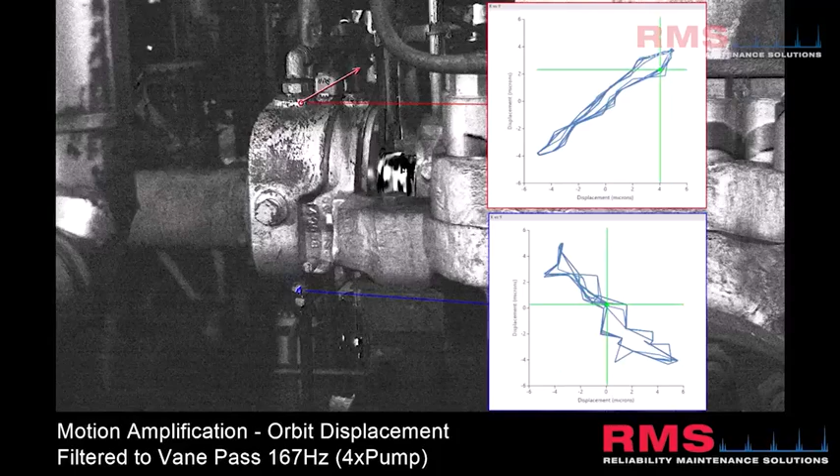And this is where we have a machine that might have a natural frequency, and that might be on the structure or part of a component, that when it's excited, the amplitudes rise dramatically and can lead to catastrophic failures such as cracking, bearing problems, coupling problems, seal problems, all these host of problems. But to identify a resonance problem, we need to measure the natural frequencies.

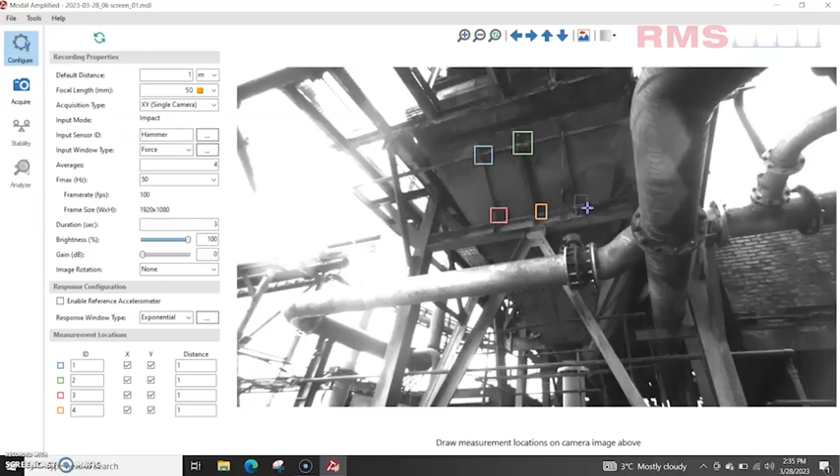And this is where this new Modal Amplified kit comes in, where, it's quite amazing, we're going to use the camera non-contact. We're not going to be putting accelerometers on to do a modal test. We're going to use the camera and we're going to use ROIs, little boxes drawn on the image, to actually measure and calculate the natural frequencies.

And then beyond that, we'll be able to see the mode shapes, where we can actually see the movement of the machine. And when we can see that, we understand it even more. And then we can maybe look at bracing, other techniques like that.

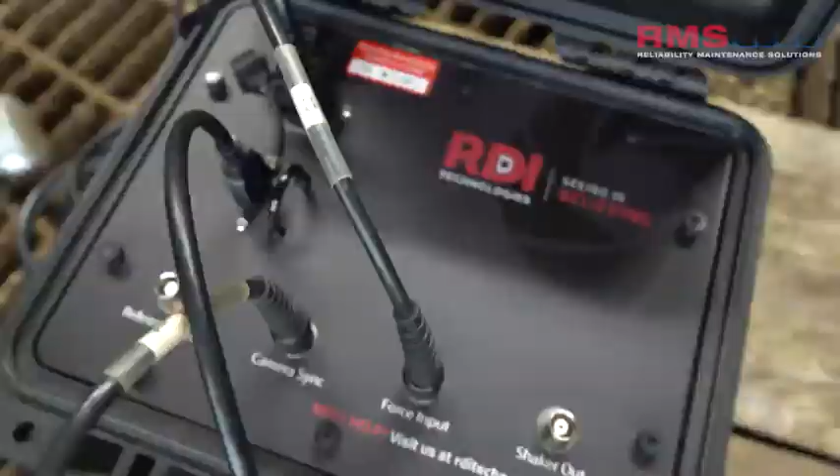So today, I'm going to use this impact modal hammer, and this connects into the Modal Amplified DAQ unit, and then that is connected into the camera, so it's all synced together. Quite an amazing bit of kit.

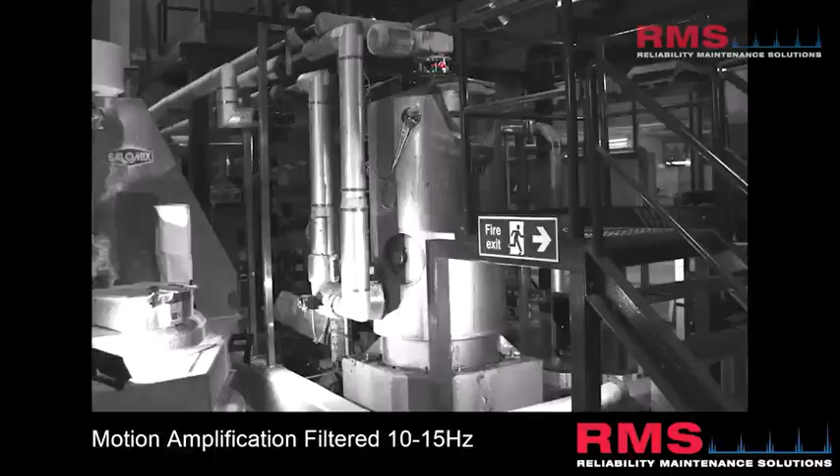So what industries does this modal testing, bump testing, resonance testing apply to? Well, a real wide range really. We've got industrial, like we're here today, so you might have problems with fans and pumps and structures in an industrial environment where you suspect you've got a resonance problem, so we could apply the Modal Amplified there. And another big sector is R&D, research and development, testing of components, manufacturing. There's a real need there, and a lot of modal testing's done there.

But what's the advantage really of the Modal Amplified? Well, for me, its biggest advantage is a massive time saving. So if we wanted to model this fan doing modal testing, we'd have to put different accelerometers in different locations, bump it, set up the software for all the locations, for the sensors. It is extremely time consuming. So something like this might take a day to model, whereas with the Modal Amplified, once we're set up, we can literally do it within minutes.

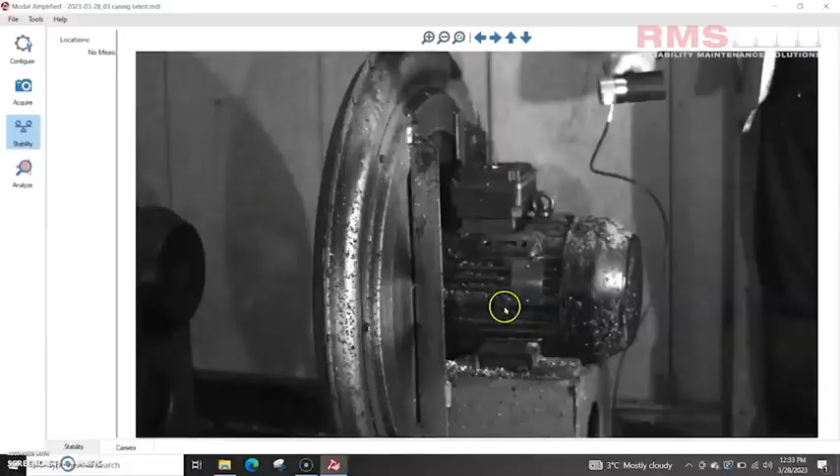And the other benefit is once we've got the data, we can take that away, and if I want to draw my measurement points, which are essentially the accelerometers, but we're using a region of interest, a measurement point, we can move those anywhere later on and recalculate the data. So truly amazing, massive time saving.

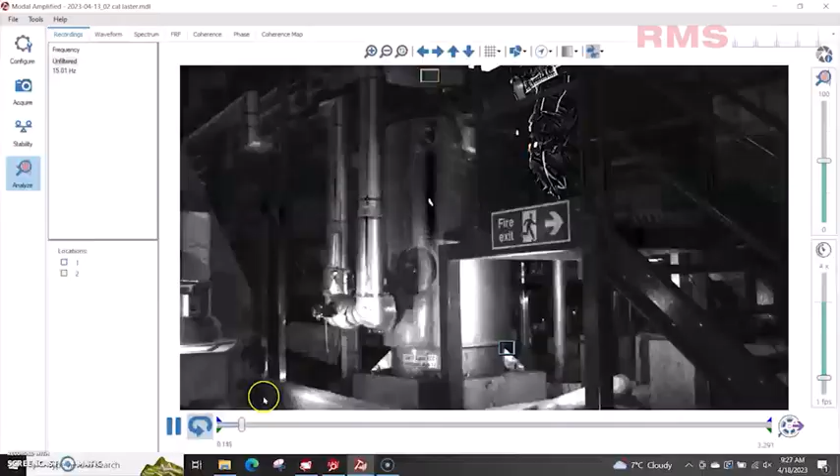So for me, I think this Modal Amplified technology, instead of doing modal only when you really need to do it, is going to bring it into areas where you can use it a bit like the camera for ODS, pretty much all the time, because it's that quick. So you might want to just check your test bed out before you do some modal testing, and you'll be able to do this quite easily. So yeah, fantastic piece of kit.

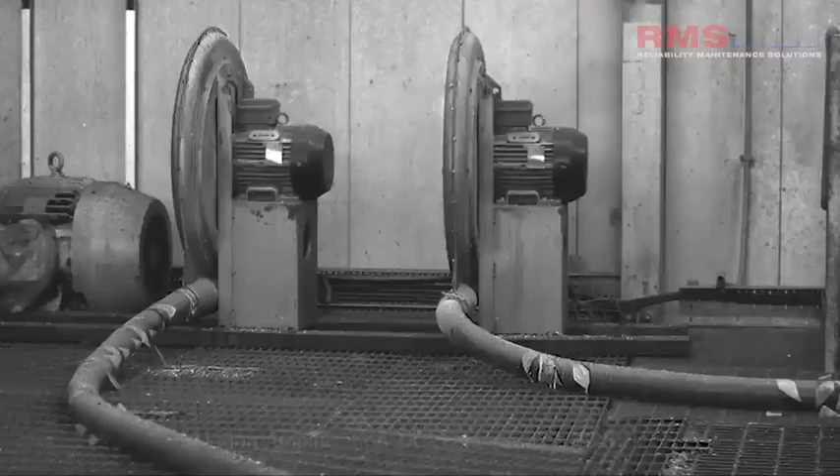So how do we know when to use this Modal Amplified technology or to do a modal? Well, we've got a fan here that's on a routine vibration route in an industrial facility, and basically we're getting high 1x vibrations. We're getting quite a lot of vibration off the casing as well, with levels of around 20 millimeters per second. The fan's been away previously to be balanced, but we're still suffering from the problem. So it's got all the hallmarks of a possible resonance problem.

So what we're going to do, the machine's off now, we're going to set the kit up. We've got the Modal Amplified box tuned into the camera.

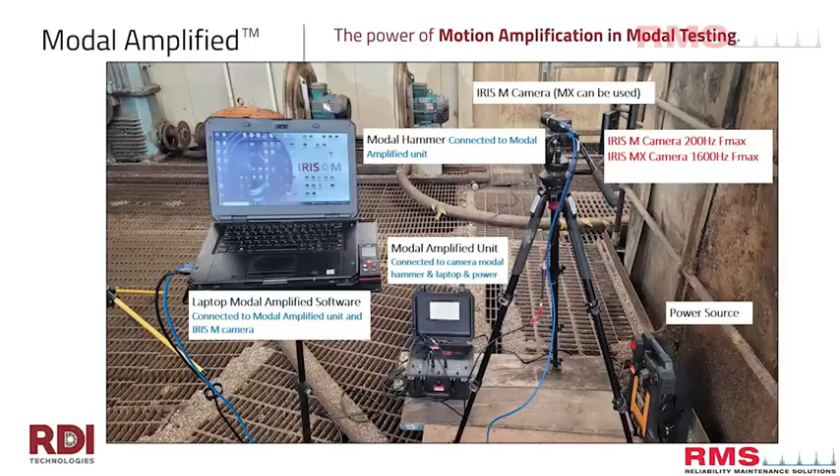We've got a modal hammer as well. We've got that here that again connects into the modal system, and we're basically going to set up a job, bump this machine, and then try and visualize the natural frequencies.

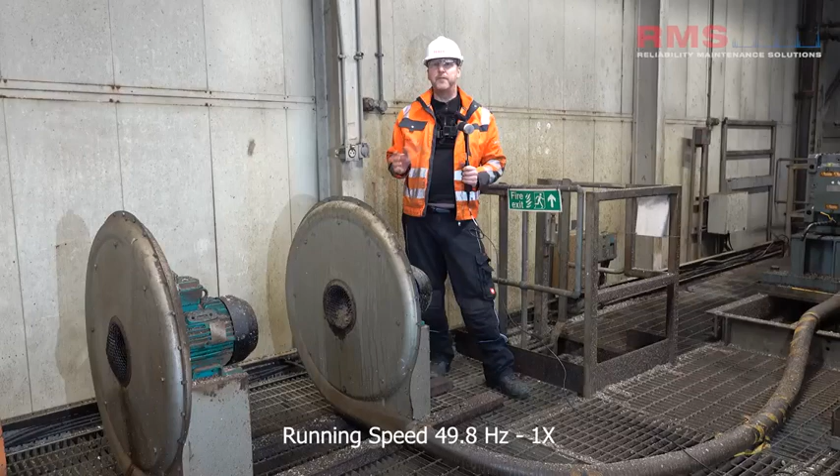Now this runs at, I think, 2980 RPM, so just under 50 Hertz, 49.8. That's where we're getting the majority of the vibration. So it'll be very interesting when we bump it. Are there any natural frequencies close to the running speed, basically? So yeah, let's do that now.

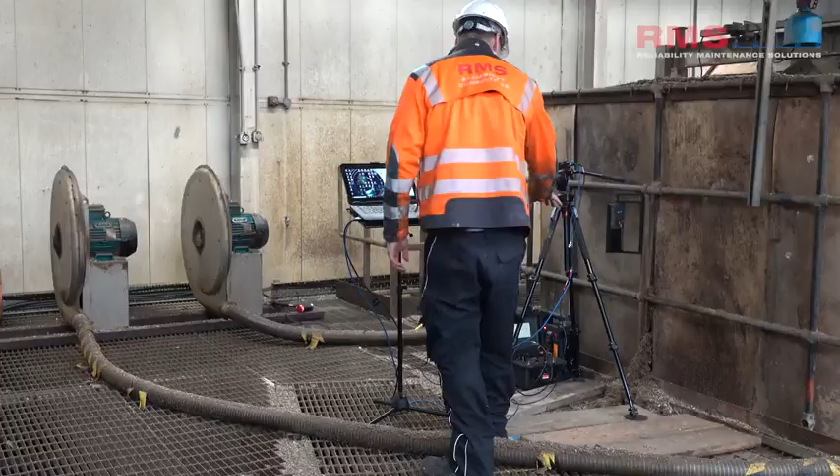Laptop, everything's connected up to the camera. We've got the DAC unit syncing into the camera. We've got the modal hammer connected in, and we're going to do an acquisition. So the first thing I'm going to do is go into the software, and we're going to create a project. So we've got impact, shaker, and operational, but we're going to just use the impact one, and we'll call that fans.

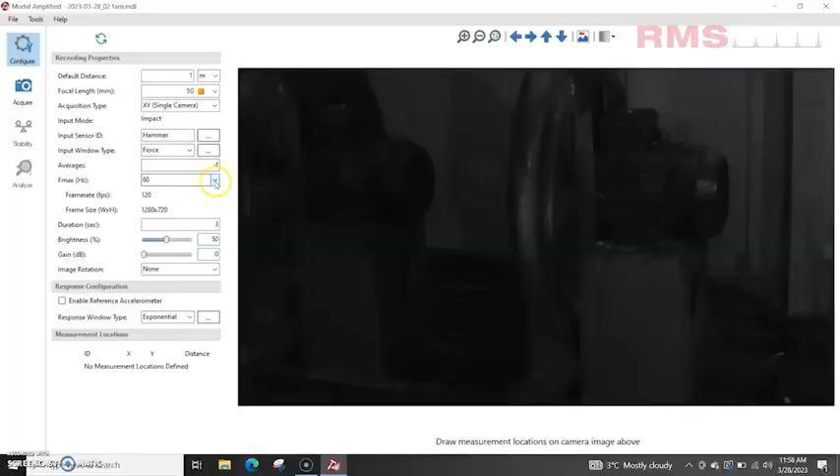Okay, so it's going to bring my camera up now, but I'm just going to add some light because it's a little bit dark in here, just as you would with the M8. Right, so I'm going to drop the F-max to 50 just to give a bit more of a wide field of view. We can move this brightness up, that's better. Let's just check the focus.

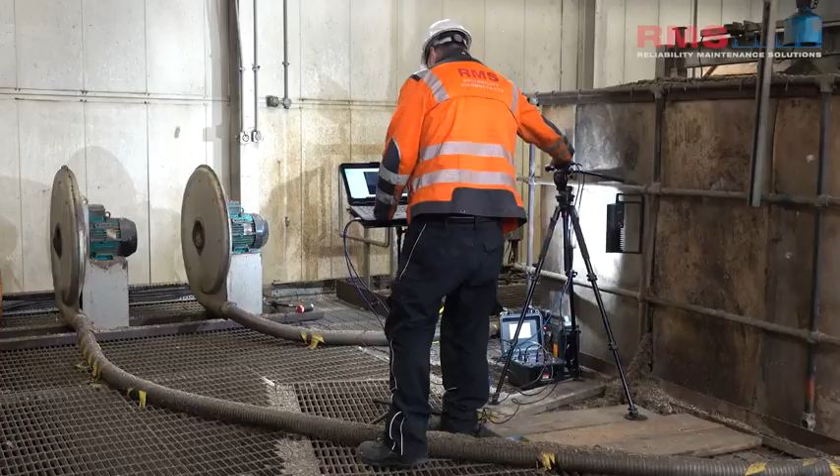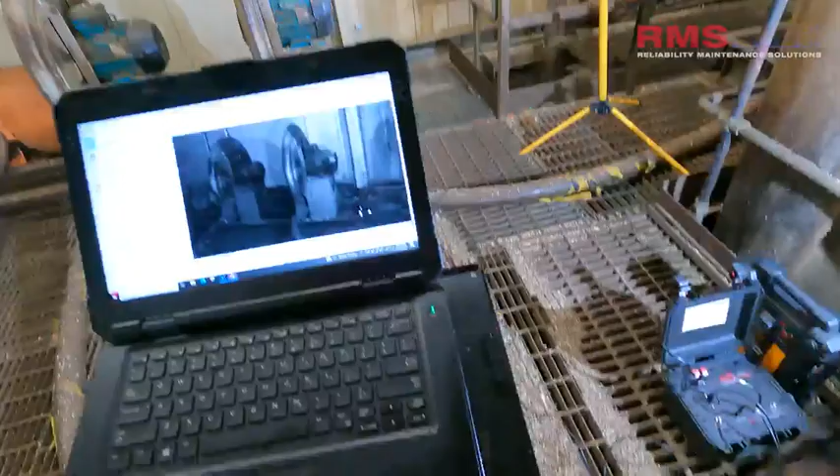Let's focus there. Okay, right, distance, let's put that in for the measurements. So I'm just going to do that to the motor. What's that? 2.6. Okay, focal length 12.5 mil. Right, you can use on this the dual XYZ camera, the stereo vision, so you could do measurements towards the camera, but we're just going to use the standard Iris M today.

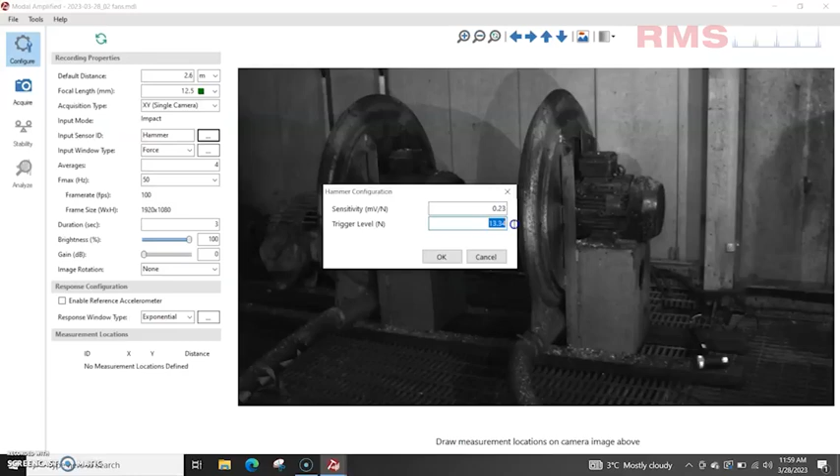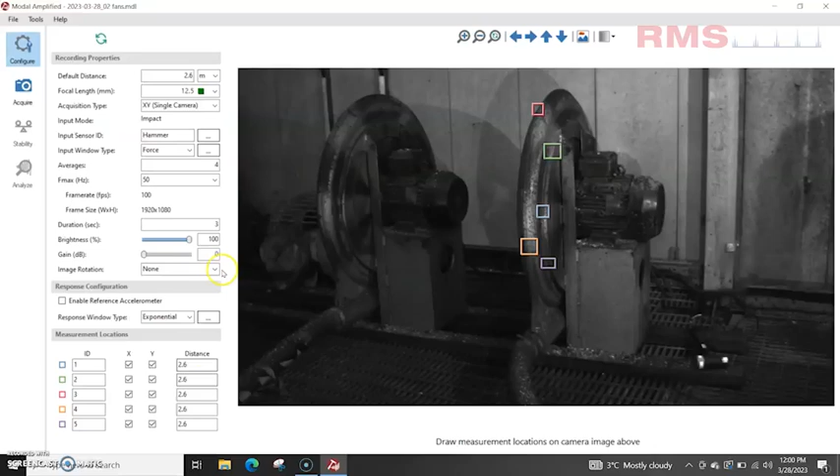Hammer. So the hammer I'm using today has a sensitivity of 0.23, and I'm going to be doing some reasonable impacts on this one, so I'm going to up the trigger level a bit. Average is 4. F-max is correct, brightness, 3-second duration, and then this is really quite cool now. We can actually draw measurement points, so these would be the equivalent of your accelerometers. I'll leave those distances right, and then we're just going to acquire.

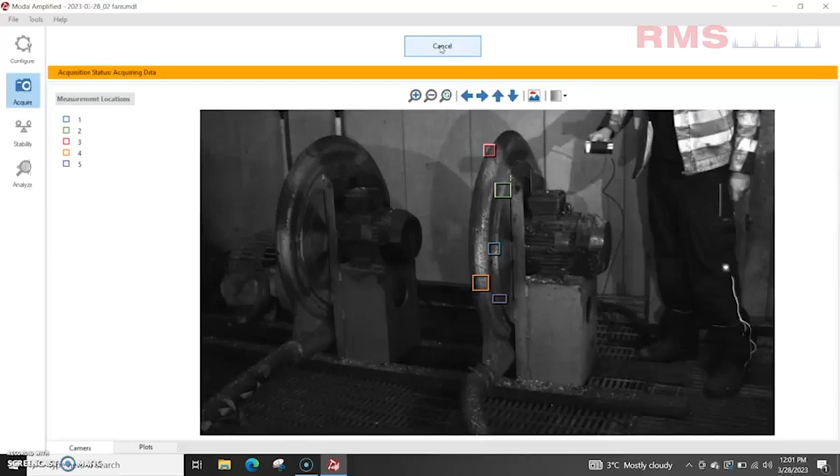Okay, you can do this on your own. In auto sample, sound on, I'm just going to spin the laptop so I can see the data, and I'm just going to click collect sample. Okay, so I'm ready. I've got the hammer connected. What you've got to be careful of is not to trigger the hammer here, so I'm going to get in position and then strike the casing. That's taking a reading there, nice data.

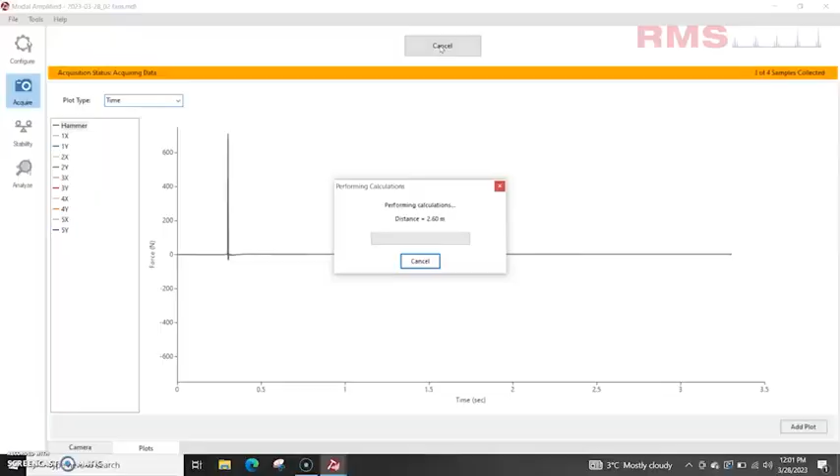Second average. That's looking good. Third average. What you've got to try and do is just hit it a similar amount. I think that'll be it. And you get a little different tone there. So finished with that, I'll save my lights. Okay. Let's turn that off. Right.